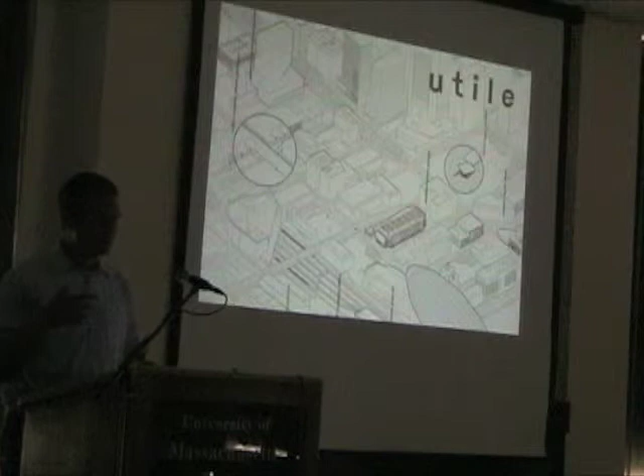I know I was just in the office of Dennis Swinford before this, and we were talking about a certain era of buildings which happened about 30, 40 years ago, where oil was cheap, insulation was not really a big consideration, and at the time new construction techniques and materials were coming on the market, specifically metal studs. That whole era of metal stud buildings with fiberglass—a small amount of fiberglass infill—is really a huge plague in the building industry right now. There are so many of these buildings that are being re-looked at and rethought, having to tear off and redo full building envelopes and things like that. I actually have one of those to show you as well.

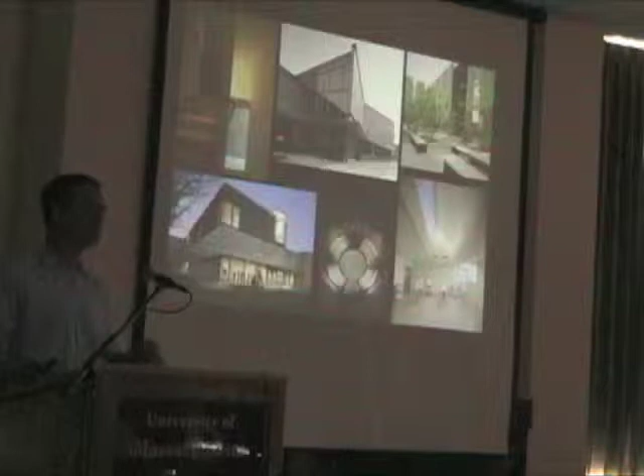But so I'll get right into this—just a quick overview of the firm. Utile, we have—I have 3 other partners, so there's 4 equal co-equity partners, and we all worked for Machado and Silvetti for a number of years. To a certain extent, we were working on some of the most important projects there and being integral to the execution, the design, the administration, all aspects of those projects. At a certain point, we kind of—we were working all over the country. So in the case of buildings like these, we've got...

Well, this is the building I did out in Arizona with Wendell Burnett, so that's not a Machado and Silvetti building. But this is the Provincetown Art Museum. This is the Rockefeller Stone Barns down in Pocantico Hills, New York. The Olson Library. This is the Arizona State University Hassayampa Dormitory Project, an academic village. Oh, again, one of the P-Town Art Museum. But also missing from this, the Getty Villa. So we were, me and my three partners, kind of traveling all over the country, very exciting, working on great projects.

And then we all started to have kids. And then we all started to realize, well, this travel isn't all it's cracked up to be. So in a sense, we also were then thinking about starting a practice.

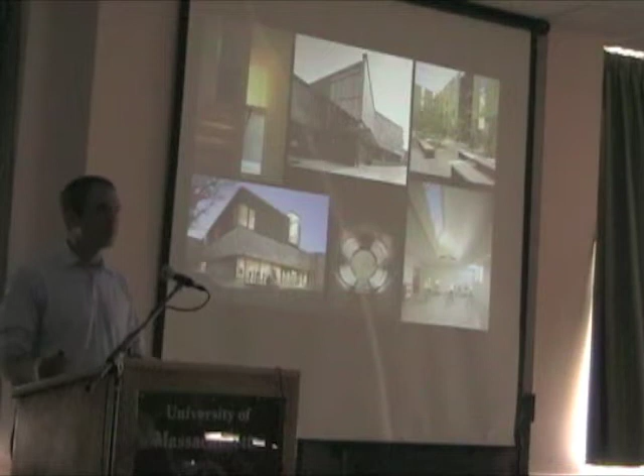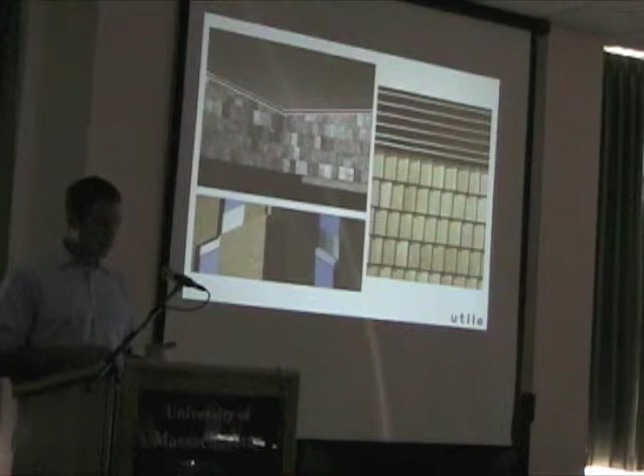And so when we finally did that, we decided very specifically that we were going to focus on the Boston area. This was just a slide I slipped in here as one of my own personal interests, that as I was working at other firms, the idea of developing facades which had a certain specific contextual relationship to the places they were at, trying to do so in a way that was a modern expression of an enduring vernacular.

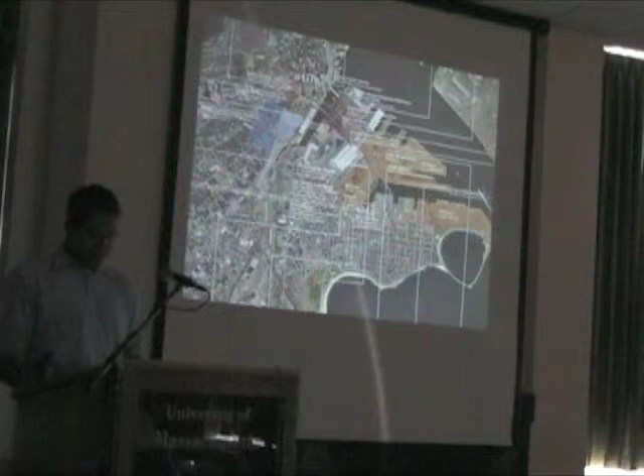Anyway, so we decided to focus on Boston and really get to know Boston better than anybody, be the Boston expert so to speak. There's a lot of competition for that post. In one sense I don't know that we ever achieved it, but we tried to position ourselves knowing that the Getty and all the wonderful museums around the country had already been built, the economy was starting to not look so good, and we asked where could we start to look for work, what markets could we look at. We really tried to become experts on a very local area, specifically Boston, and also tried to become perceived as experts on the approvals process in the city of Boston, which is onerous at best.

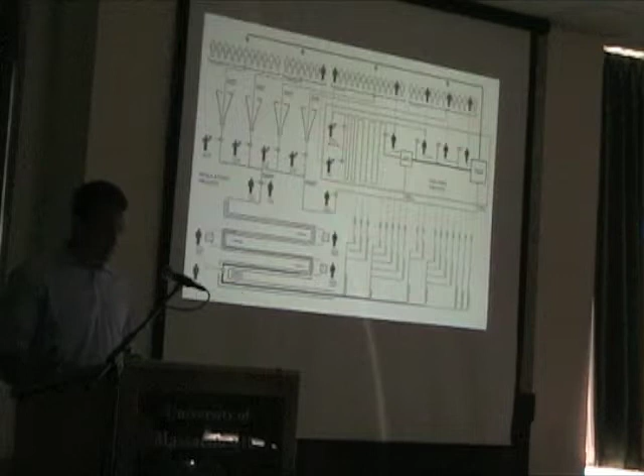And the whole nature of how a project works - how a developer buys land, tries to figure out what they're going to build on it, goes through the approvals process, gets turned through the meat grinder of the neighborhoods - by the time you get to an approved project, it's a different program, a different size, different everything than you thought at the beginning. How does one try to streamline that process, or get to know it well enough to be tactical about achieving an end in terms of good design, highest and best use, and serving your clients well.

The other thing I think about Utile, which I think is unique from the origins of where all the partners came from, was that we decided very consciously that we were going to really work with our clients in a very collaborative way. We all have our own agenda, but at the same time architecture is a bit of a service industry. So keeping that in mind, and always with the best possible design as a goal, focusing our energy in certain places helped us get to that goal.

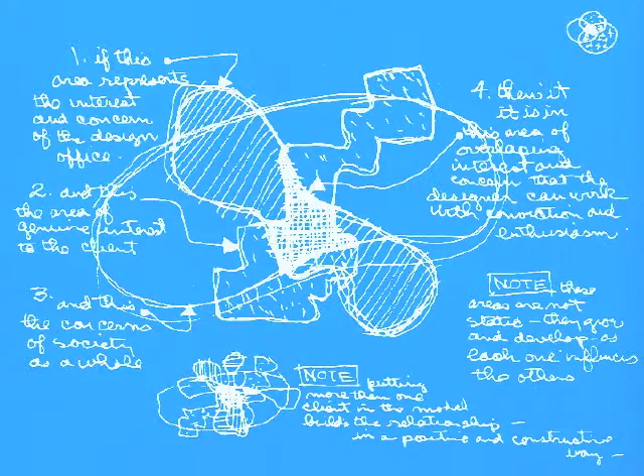And so we found this diagram that Charles Eames had made. What I like about it is it shows that if this is the area of interest of the architect, and this is the area of interest of your client, and this bubble represents the public concerns of society as a whole, then if we take the area where all three overlap and focus 95% of our energy there, we're going to come up with the best buildings or the best project possible. I think what differs in that mindset from a lot of firms, at least as they were even just a few years ago, is that we saw this as a liberating moment, not a restricting one.

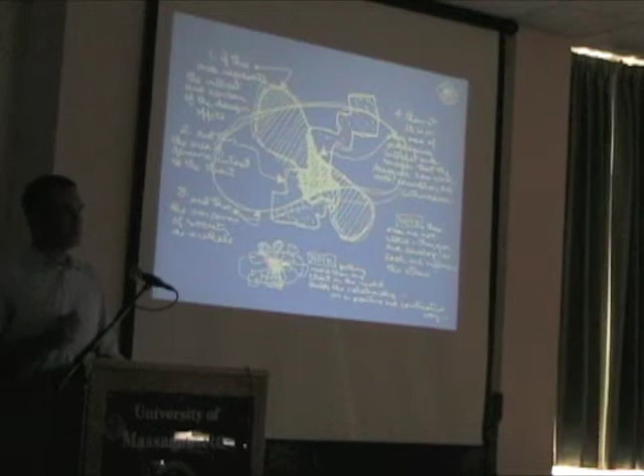This wasn't our big cave-in, where we're just going to acquiesce to the whims of the client. It was really about being able to find those territories where, when we focus our energy, we get the most result from it. So it was really that kind of thought process, and it's one that I think we've fairly successfully been able to live by.

So when we first started, the housing market in Boston was booming, and it was really through the vehicle of a robust housing market that we were able to start working on buildings of some size - buildings we could get built in these neighborhoods, going up with Utile signs on them during construction, getting our name out there and getting some good feedback from particular clients. In the case of these urban infill projects, they were always trying to solve a problem.

This is one of these old problem, new solution situations, and I actually think it's a new problem with an old solution. These post-industrial areas of South Boston were never planned to be residential neighborhoods.

They came along with blocks that had very wide dimensions. In the case of this building, which we call the trolley house because it used to house trolleys for one of the little sightseeing tours in Boston, the front of the building is here on West 2nd Street, and the back is on another street I can't recall right now - it was a through-block condition, a 115-foot deep block.

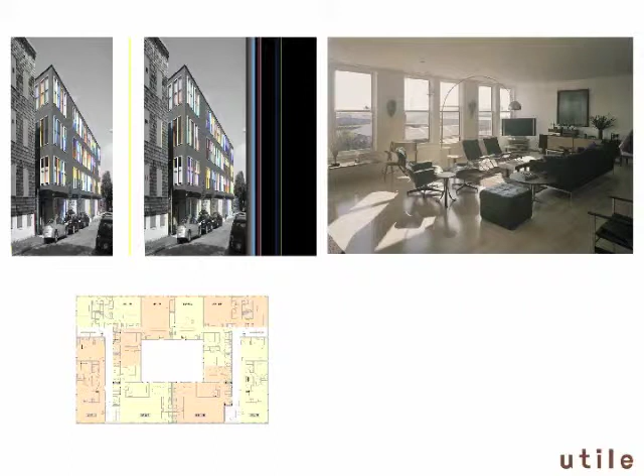So how do you end up trying to create good urbanism, keeping a tight facade on the street, holding the street line in a building that deep - too deep for a traditional double-loaded corridor, but not deep enough to separate into two buildings? We came up with a courtyard scheme, working collaboratively with the office of David Nielsen.

This one, and that one, and this one right here are similar sites. They're right next to one another - you can see the trolley house there, and this is the building right next to it, which we call 321. This building had the same condition.

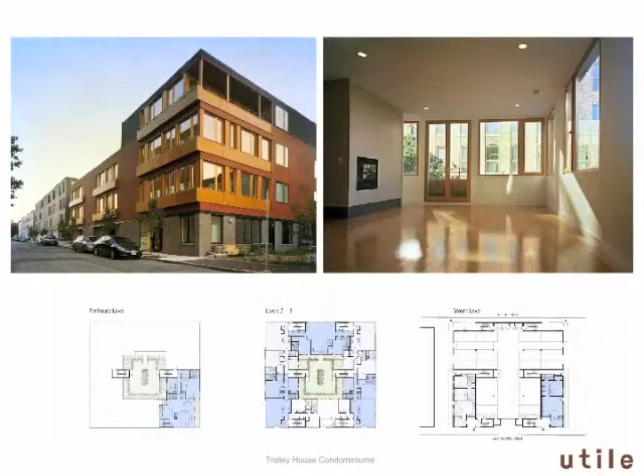What it was really trying to do was use a functional equation of point-loaded stairs instead of corridors - this idea of the double-loaded corridor. Has anyone seen the movie The Shining? The guy on the little big wheel running down that corridor - that's what we wanted to avoid.

We wanted to avoid that endless double-loaded corridor, which is oppressive and difficult. For a building like this, which otherwise would have had a double-loaded corridor if the developer had their way, we demonstrated that using point stairs eliminated all of that corridor space. The stairs have some construction cost, but they took up about 50% the square footage that the corridors did, and at $425 a square foot in this neighborhood, the developer very quickly realized how much of an advantage this was going to be.

Additionally, just to show it's not only about the numbers, we were also trying to create a condition where instead of a long double-loaded corridor with doors off a dark hallway, you're going up a stair - and at the four major entries, plus two more back-of-house egress stairs, you're able to collect 3 or 4 units into each stair and have it be more like a South End row house, if everyone knows the South End in Boston - more of an old 19th century row house community. So you've got 3, 4, 5 neighbors you see on a daily basis as opposed to 15, 20, 30. It really changed the scale perceptually of the building, in terms of how the communities work.

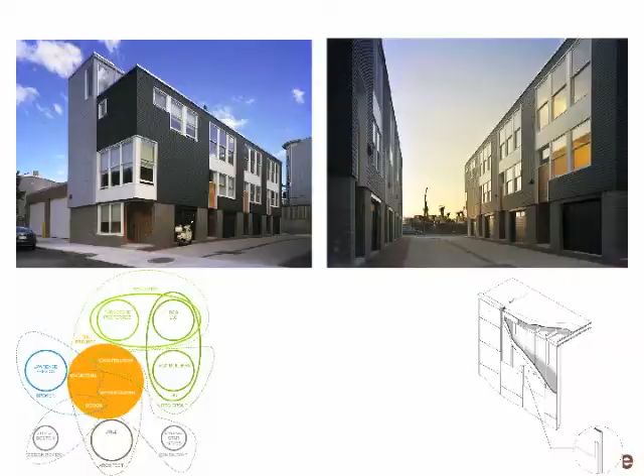I was having some consternation about our relationship with the developer, who also happened to be the contractor - they had their own separate contractor entity, and they'd brought in a real estate person, and there were all these entities flying around, all of whom seemed to think they had the authority of the owner. We all know it's really the architect that has all the authority. So we made this diagram one day in the office because we were getting feedback from all these different people, and thinking about how to organize it, prioritize it, and give it a hierarchy. We do stuff like this from time to time.

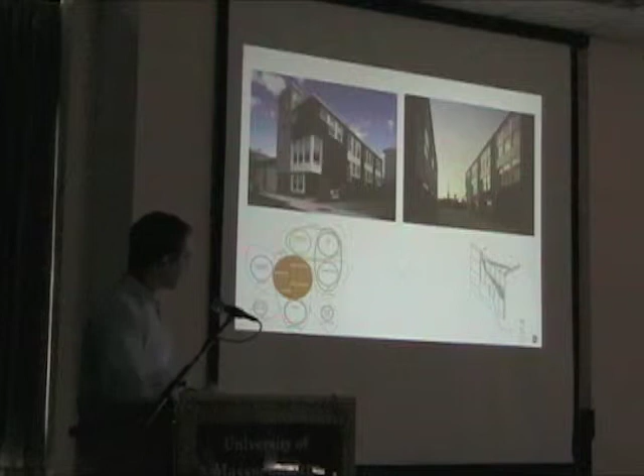So in addition to the urban infill housing work that we do, we also do a whole project type, I guess you'd call it, which we call the urban intervention or almost urban furniture types of projects.

In this case, this is the Harbor Island Alliance Pavilion, which is basically a visitor center for the Harbor Park, the Harbor Islands National Park in Boston Harbor, which prior to this project, and I don't know if it's still the case, I don't think so, but was the nation's least well-attended national park. Now, this wouldn't be a big surprise if it wasn't two miles away from a six million person metropolis.

And so really what the National Park Service wanted to do was begin to publicize this. They wanted some kind of a structure which helped, which was a place where people could go to find out information, to orient themselves. What are the harbor islands? What can you do on them? If I want to do this, which island do I go to? What are the schedules of ferry boats?

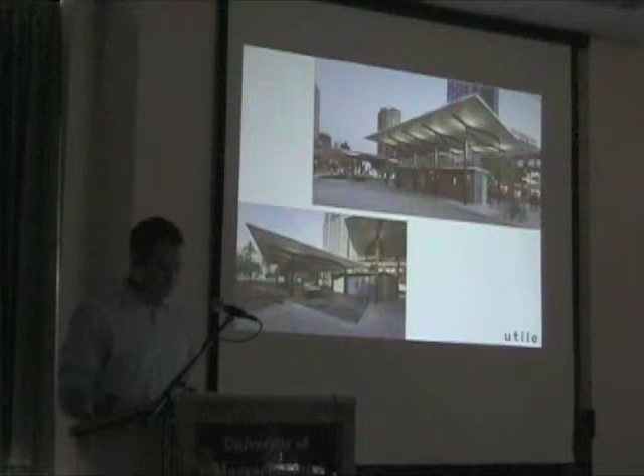But also to be a kind of 3D calling card or a presence on the Greenway in Boston, which as many of you know is one of Boston's most important public spaces. It's not even close yet to being one of its best public spaces, but hopefully at some point it'll get there.

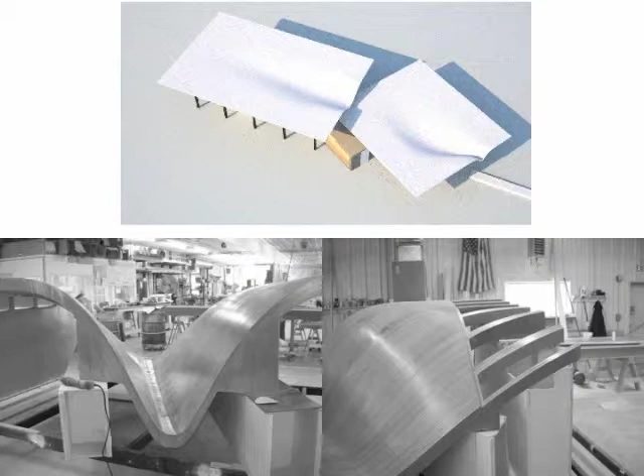So a very fun project, which what's interesting about the forms of the roofs here, which you can see these are the actual forms that were being cut with CNC routers and all that. We've had questions on these as to what the forms mean to us, and are they seagull wings? Is it a sail of a ship? And the real answer is no.

It's just a very fun way to get water off the top of the buildings. And so we were draining these things from one roof to the other down to a little water catch basin at the bottom, which then was helping to re-irrigate some of the gardens on the Greenway.

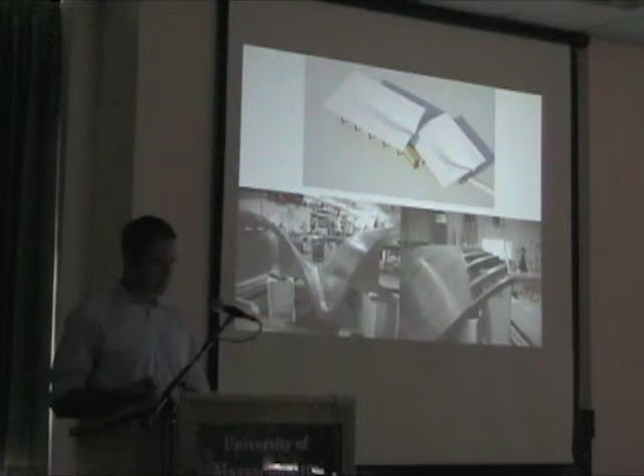So again, there's a kind of an empirical drive behind a lot of these things, which hopefully result in beautiful form. And it was really, I guess, a good example back to the Eames diagram of where our interest lied in the beautiful form of this, where the client's interest lied in collection of water and keeping people dry, in trying to overlap these complementary energies, let's say.

This is another one of these projects that falls in the same category. And for those of you who know the Convention Center in Boston, the Rafael Viñoly building, just outside of that. So what you're looking at here, this is the overhanging cantilever of the building over Summer Street here, and just outside of that, the Convention Center wanted to have a marquee sign.

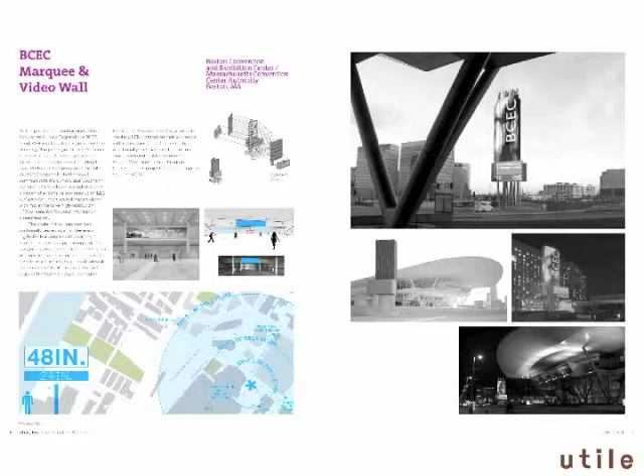So they hired us along with SGH, which is a structural engineering company, to come up with an idea for this. And we went through all kinds of studies on this, the Las Vegas casino signs and how these things work, don't work, what's good about them, what's obnoxious about them, and eventually came to a strategy that worked for the Convention Center.

And the basic idea is that this lower part here is all high resolution LED screen. So it's information, it's up and coming exhibits, things like that. And then the top is low resolution, and that's more for, let's say, more experiential or atmospheric types of program.

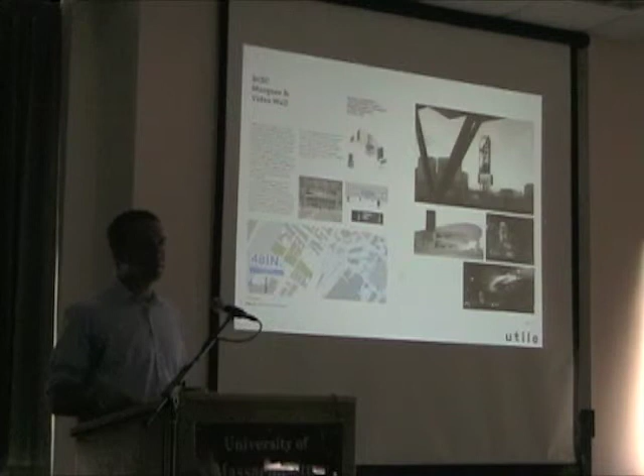So it's not necessarily announcing anything, but maybe if the flower show is happening there, there's a kind of moving composition of flowers under it or something, so that it became complementary to the information, but it also became a beacon, which you can see all the way up and down Summer Street, and is really a particularly important moment where all of these conventioneers coming from South Station or from downtown, and someone points that way, and to be able to see the prow of the Convention Center roof hanging out over Summer Street, and this marquee sign all lit up, seemed like a sort of good urban organizer.

And what you see here is this Andy Warhol-like composition here is just on Thursday of last week, we were testing the LEDs. They were turned on really for the first time, and we were cycling through the different colors and looking at this stuff, and so it was all very exciting stuff. So this is almost done.

This is a stair ramp project that we worked on with a loosely associated group of clients that came to us primarily as a single potential hotel operator down there, and then the convention center got somewhat involved, along with a bunch of different property owners.

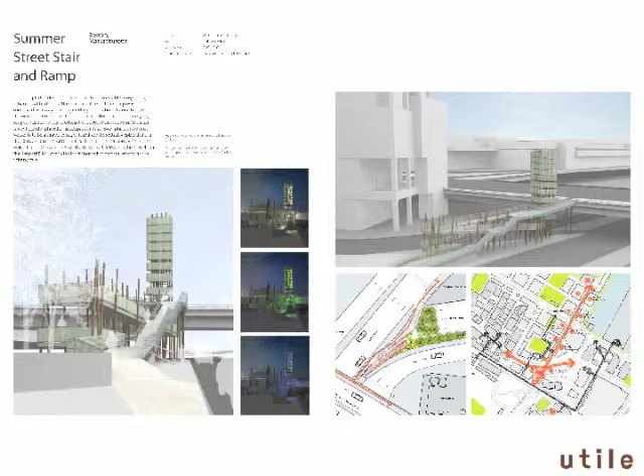This was a way to get people from Summer Street, which is elevated about 30 feet above the Seaport District, down to the Seaport in an accessible way. Looking at the existing layout of the land, there are very few ways to get from Summer Street down to the Seaport. There are two neighborhoods that really need to be connected, because either one on its own isn't a particularly robust neighborhood, but together they form a much more meaningful neighborhood. So this connection really was important.

We were originally proposing that this connection be made by something like a hotel, whose lobby could span the distance. A hotel lobby is an interesting project type, a public space which is privately owned and operated and maintained, but open 24 hours a day, and anybody can walk right through it - a kind of public-private collaborative space.

A few other types of project - this is a renovation project of a hotel in Provincetown. This was an old Holiday Inn, which then became the Cape Inn, and now it's the Harbor Hotel Provincetown. It's the largest hotel in Provincetown, 141 rooms when we got to it. It's 128 now - we suited some of the rooms and things like that.

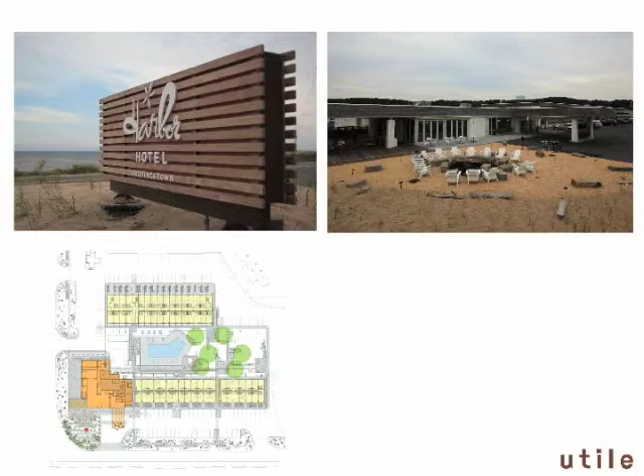What was interesting is this was a place where you'd go and take a shower in the morning just because you felt like you'd slept in the grossest place ever. I hope nobody who loved this place is watching, because I know a lot of people, for whatever reason, loved it as it was.

We had a super enlightened client on this, and we talked with this particular client group for a long time about whether they should buy it or not. We made trips down there to talk about it before they even bought it, spent some time there, and finally when they bought it, they hired us to renovate it for them, and it was a lot of fun.

So this is Commercial Street in Provincetown, and the water is right here - this dashed line is the high tide line. Originally the hotel was completely surrounded by a parking lot, and that's mostly still true, but at a couple of key spots it's no longer true. You've got two bars of rooms here, a pool area in the middle, and all of this was renovated.

The rooms are all renovated. We wanted to do much more extensive exterior renovations and repositioning, but the budget didn't quite allow for it. We did renovate the entire lobby, restaurant, and lounge area as well, and one of the things we did was create this very cool gas fire pit and an outdoor deck area, which is covered and enclosed.

This was an old porte cochere where people would come and drop their car off to be valeted, back in the heyday of this hotel. It had long since been in disuse, so we captured that outdoor space as covered deck space, took what was a parking lot out front and made it sand dunes with grass, and added this live fire pit, which people see going as they drive by in the evenings, and all sorts of people sit out here.

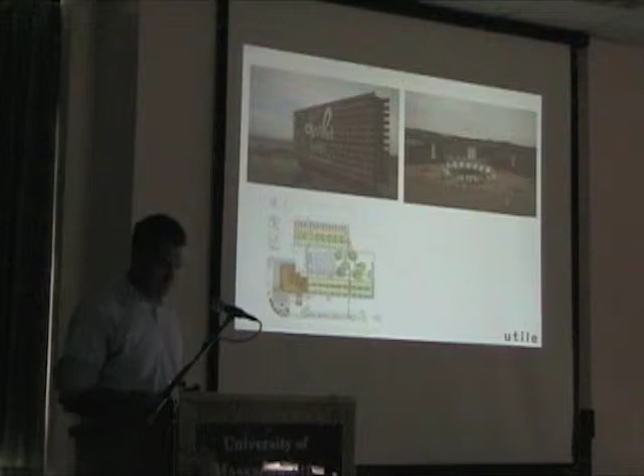It's something about fire. So the rooms went from being dark and nasty to being what the client aspired to - a super clean, modern look. They wanted it to feel no frills, not bogged down, as bright as possible, so we renovated all the rooms and also the public spaces.

So this is that old carport area with the captured sun deck, looking out to the ocean. Part of that dunescape in front of the restaurant was so the dunes come up just a little bit, so you don't have cars parked in front of you, but it also begins to screen the road, which is right there. So yes, you'll see cars go by, but you don't feel like you're part of the road - the road surface actually disappears from view.

Some of the interior spaces—curtains are great for hiding things that are otherwise immovable, like big fire standpipes, fire protection sprinkler standpipes, and things like that. I guess who doesn't love a bar?

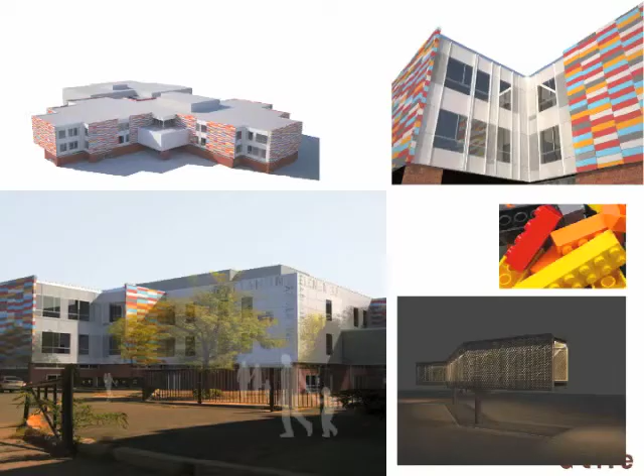So a couple other types of projects we're looking at: we were doing some elementary school work. This is a building called the Mattahunt Elementary School. It's in Mattapan, in this really super cool location in the city. It's an urban, inner city school, but at the same time it's on this piece of land that's surrounded by trees—a real unique condition there.

When we came to it, it looked like any hospital along I-80, anywhere USA—a totally white building with very small punched openings. The one thing that was happening was that the building envelope was failing. The systems weren't working, there were breezes coming in, the kids were cold and drafty. But the ultimate embarrassment to the city was that one of the sprinkler pipes burst, and somebody driving by could actually see water pouring out of the third floor between the cracks in the building envelope. Normally you'd expect a pipe burst to result in a flooded basement—well, this was being seen on the outside of the building.

So they decided they needed to redo that. Lucky for us, we got a nice project out of it. We took the tack that it's an elementary school—kids respond to Legos.

There was also an ethnic demographic there which was really excited about the color of the building. We tested several safer colors that the city had preferred—I think not because they liked them better, but because they thought that's what people would like in general. When we went to the school to show this to them, they almost unanimously loved this more robust color scheme.

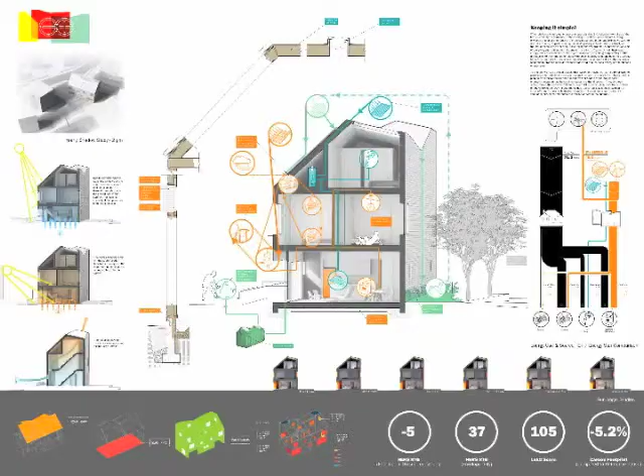But we do—and I guess we're going to find out tomorrow night whether we won this or not—these boards are from a competition we recently entered. This is a competition with real sites and a real building at the end of it.

We had a developer partner with this. It's a competition put out by the BRA and the mayor—Mayor Menino in Boston. The idea here was that you were supposed to come up with multifamily housing projects which were prototypable, redeployable, and produced more energy than they consumed.

For various reasons, the sites they had for these weren't deep in the city—they were more on the fringes, more of the stick-built, wood-framed outskirts of the city. I'd say outlying, but I suppose that's not very flattering to some of those neighborhoods, which I was actually born in.

The idea is coming up with a prototypable housing idea that we've got to be able to build, make it work, and sell it—but also that other people could then use it as a blueprint for how to do this. Once you get into some of the ring neighborhoods of the city, there are lots of these little empty sites that probably in the past had a triple decker on them, which I believe is Boston's most important contribution to architecture, by the way.

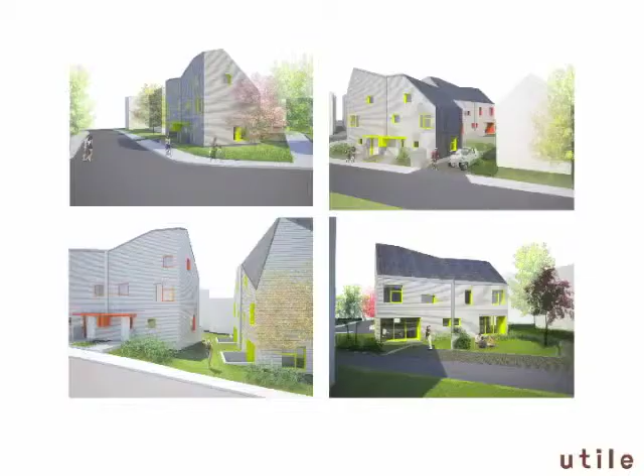The idea is that you could create something that Joe Pickup the builder could pull up with his pickup truck, his typical subs, his four guys, his carpenters that work with him, and build one of these things with only a little extra help in terms of things like photovoltaics, and actually reproduce something like this. So anyway, this was our stab at it, and we'll soon know how we did.

We also occasionally dabble in single-family houses. This is a very interesting client in the Adirondacks, and this is a vacation house. What's interesting is this particular house, contrasted with a couple of the next ones I'm going to show you, really are at the heart of some of what we're going to talk about here in a few minutes. I'm going a little longer than I thought for this portion, but I apologize.

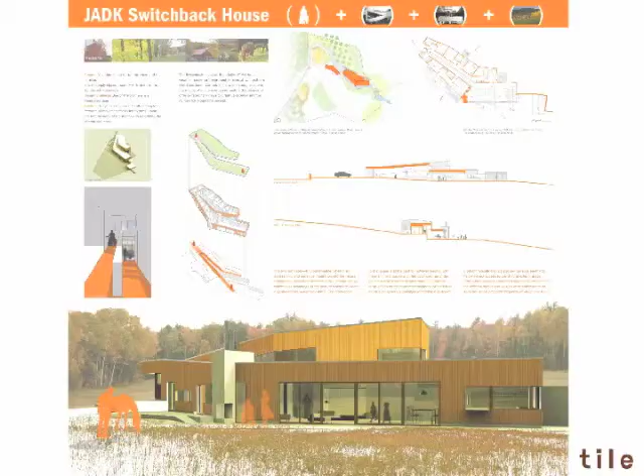There's the idea in design of radical customization, which is that every building is very specific to a certain client in a certain place, and it can't be reproduced ever, anywhere, for any reason, and it's sacred. That's fun to do, we like that. If a client comes to us and gives us that as a program, sure. But those clients are increasingly harder and harder to find.

At the same time, with the cost of building on the rise, even through this whole last few years of recession, building and construction prices did not dip by that much, not even nearly as much as the real estate market did. And so we also like to look at things which are more prototypical.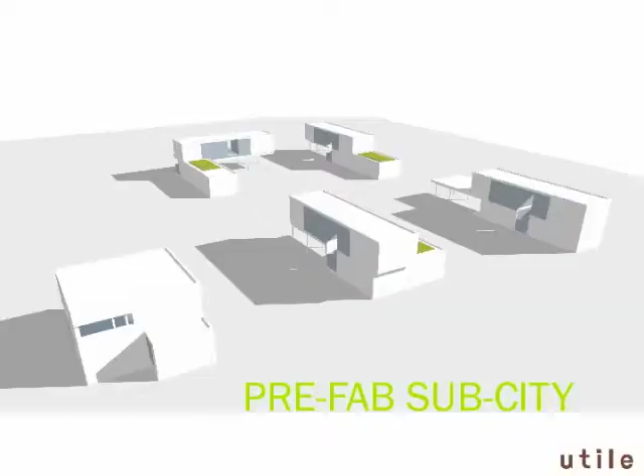In the case of this, we're now talking with a couple of different prefab companies about the idea of launching a series of cool, green, smallish suburban houses. So taking our show on the road, out of the city, and really starting to look at some of the suburban transit-oriented types of sites that might be out there.

This is specifically not an attempt to solve affordable housing in the policy sense. We do a lot of affordable housing in our office, and we probably put more affordable units on the market than we have market rate units.

But in this case, the goal is that we wanted to develop a house that, say, an architect could afford to live in, right? Which is increasingly harder and harder to do if you live in the Boston area. I know prices are a little more affordable out here, right, Stephen? But if you're within a fairly broad ring of the city of Boston, and you also don't want to commute for two hours every day, finding affordable, efficient, not too big, well-designed houses is not really an option.

So that's really kind of a subset of the other types of housing we do. And it's one of these things where, again, it's a conversation that Stephen and I have had before when I've come up on reviews, is that we always like to solve big problems with small solutions. It's really the idea of planting the seeds of good ideas which are reproducible and redeployable.

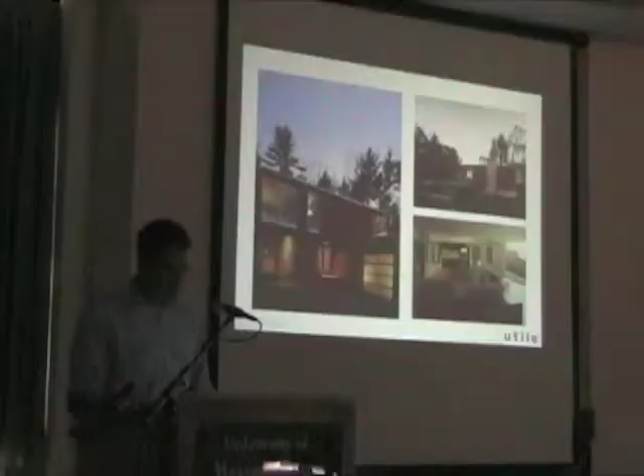We even had the opportunity to build one of these, and we did it in the form of my house. I was the guinea pig on this. In the case of this, I was the architect, obviously, but I was also the general contractor, and one of the carpenters, and one of the concrete guys. So it was one of those cases of trying to build a house nights and weekends while trying to run a firm in the city.

At the end of the day, we built this for about $110 a square foot, which in terms of construction in the Boston area is about 50% the cost of what you'd normally expect to see for a custom designed house. I guess the idea being that at some point these wouldn't be custom; they would be part of a choice that someone would make.

I want this one or that one or this one. So this particular house is all geothermal. We've got lots of glass, floor-to-ceiling glass, very simple forms. Put a little extra money into the garage door so that it's a cool thing when you pull up, as opposed to something you don't want to see. And without being too ambitious about it, for not a lot of money.

Putting together a house which is very livable. So I'll quickly go through some of this. We also do a lot of planning work. I think I said that earlier, but this is a project in Dorchester.

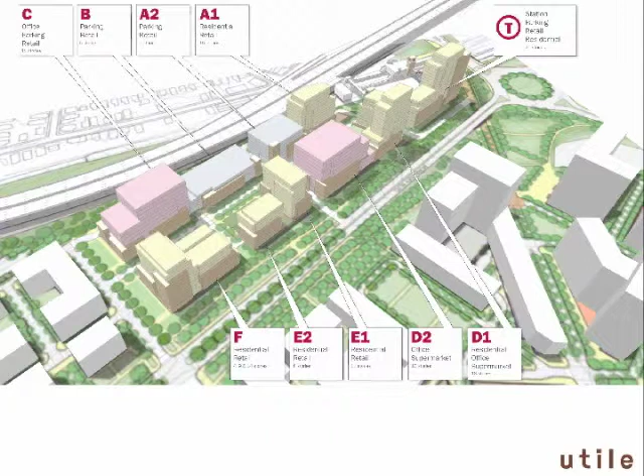Just quickly, this is the UMass Red Line station on the T station on the Red Line. This is the Southeast Expressway in this direction to Boston, this direction to the South Shore. This particular client of ours had purchased 9 acres of land here. This is currently the site of, let's see, I think the Boston Globe building is right here. I think the WB 56 building's here, and then there's a Shaw's and a couple other kind of big box, not too dense things here.

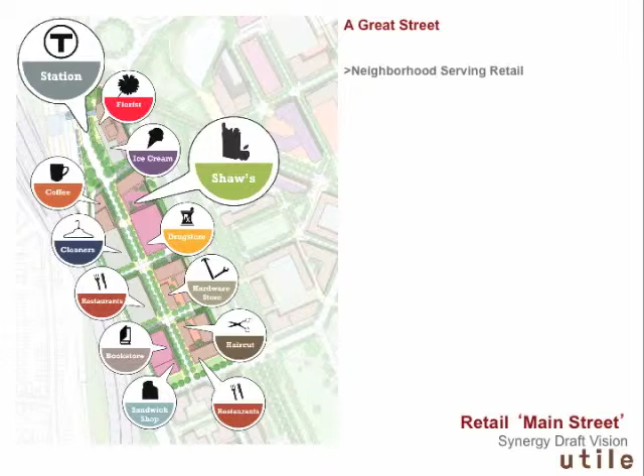So we planned this neighborhood for them, came up with block sizes, program types, target tenants, things like that. And then also took this through an approvals process and got a certain zoning envelope approved for this client.

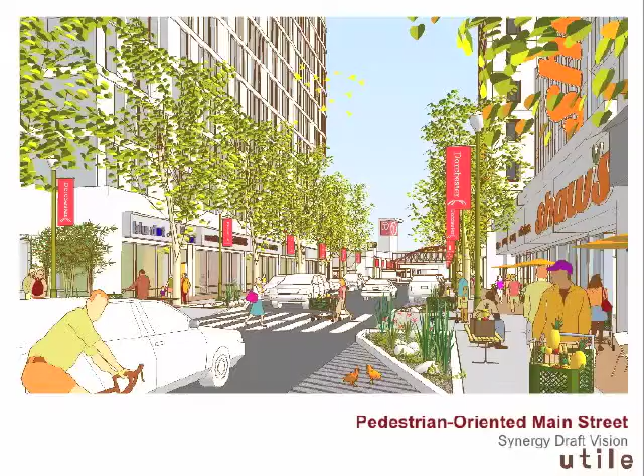And really there's a kind of artistry to these types of images where, as architects, we look at these and think, well, this isn't maybe such a beautiful rendering, but at a certain point, it's about creating a representation or an imagery which is readily interpretable, and playing off what we hope are the most optimistic tendencies of people, that people will see in things what they would like to see. You try to make images that are as friendly as possible, but that also leave as much open to interpretation so that people can place their own desires on a project. And this is a very useful tool when trying to get things approved.

Similar image from that same project.

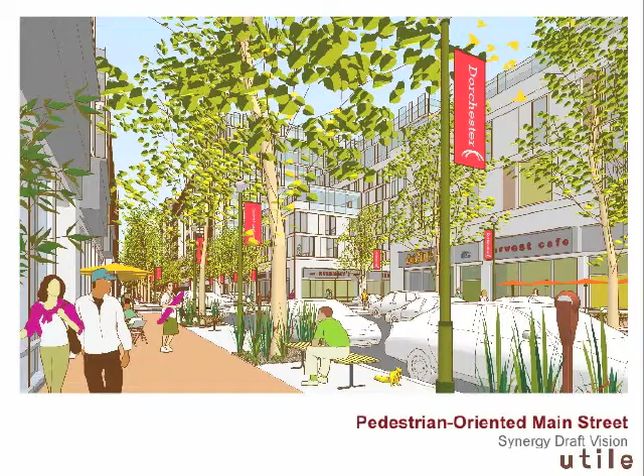And then lastly, and then I'll get into the other stuff, which is we've been doing some work overseas in Abu Dhabi. Abu Dhabi and Dubai are, I guess, sister cities, you'd say. I suppose if you lived in either one of those, you'd be offended by that remark. But they're two cities which are separated by about 2 hours by car, both in the UAE, the United Arab Emirates. Both cities have huge global ambitions.

And the difference between the two is one is a purely financial center, the other has all the petroleum wealth. So Abu Dhabi is the one that seems to have all the petroleum wealth, and Dubai, when the markets crashed, was probably hit worse than any city in the world. And so many things stopped at that point, but in Abu Dhabi things just kept going, and now they're looking, to their credit, with the Abu Dhabi 2030 plan, looking beyond oil.

They realized, in one of the sheikhs we had met with out there, somebody in the royal family had said that my grandfather rode a camel, my dad rode a Rolls Royce, I drive a Rolls Royce. My son will drive a Rolls Royce, and my grandson will ride a camel. So this may or may not be true, but the perspective is there that the free ride will only go on so long, and while they have this resource, which is otherwise hurting so much of the other parts of the world, they're actually much more interested and serious about the greening of their residences, the greening of their cars, and all of that than we seem to be at the moment. And at the same time, looking to build up an infrastructure, both financial, entertainment, leisure, that once the oil does run dry, they have an actual source of longevity and income.

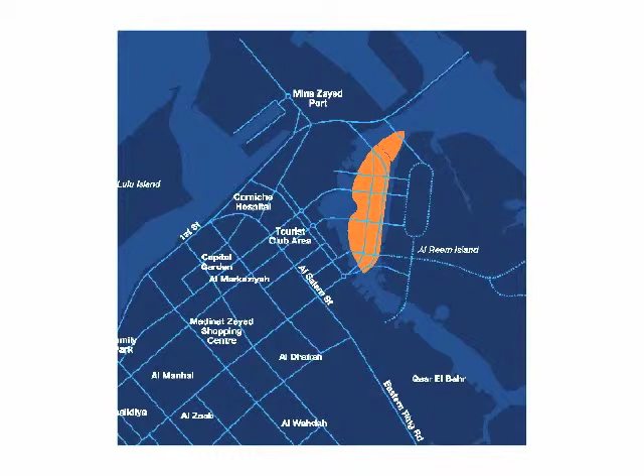So basically, in this particular case, this is an island that wasn't there two years ago, all kind of put together by the dredging out of certain areas around the city for freight routes and things like that. But they decided to take this island—just to give you scale, this is probably Lower Manhattan would be about, you know, this big here.

So it's probably half the size of Lower Manhattan, and it really is looking to be the financial center of Western Asia. What's interesting about Abu Dhabi is it's within a 5-hour flight of three-quarters of the world's population, which makes it incredibly convenient, even though the day I was there last, in July of last year, it was 123 degrees and 90% humidity.

Having spent 5 years in Arizona, I thought I was totally equipped for the heat, and I realized I wasn't.

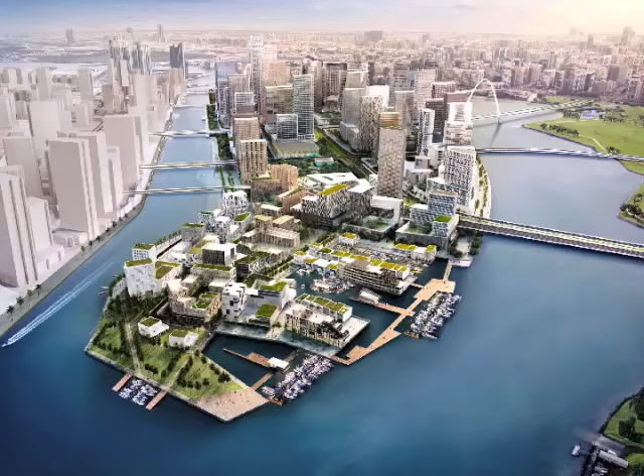They're looking beyond, trying to come up with an image for their city—one which is specifically not international style, but has a global appeal, one which is exclusively Arabic, contextual, environmental, not necessarily about a Muslim architecture, but really more about an Arabic and Gulf vernacular.

That's why they had us doing these different studies for different buildings. None of this exists yet—these are all ideas for how a city could appear, to give it a kind of organic feel that isn't just 90 or 100 of the same exact high-rise building, but buildings which all have their own flavor and their own specific environmental response.

So, future use—sorry, it's taking me so long to get to this—but the idea here is that at Northeastern, where I teach, a couple of years ago...

When I say we, I mean two other people I've talked a lot about this with, and a few other colleagues we teach with: Kiel Moe, who's been teaching at Northeastern the last few years and is now at the GSD, and Peter Wiederspahn, who's been at Northeastern for many years.

We teach what's called the comprehensive studio, the final studio students take there. We always wanted to gear this toward really taking a project beyond conceptual design—getting into the details, talking about systems integration, things like that.

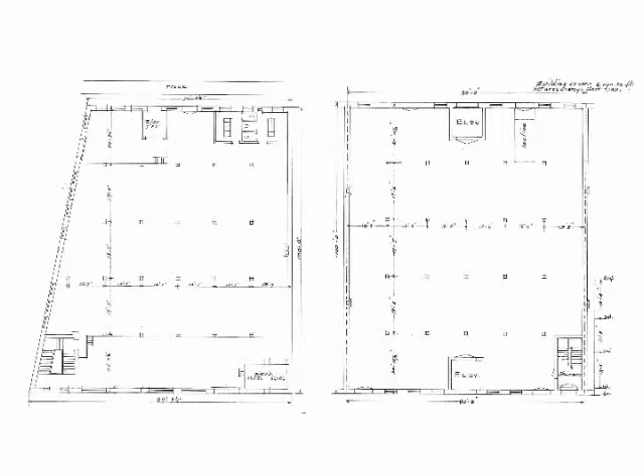Office space, though, can work with that layout. Office seems to be the one program with the least real requirements and demands on space, beyond certain size floor plates, which then become, at least in the eyes of the real estate industry, leasable.

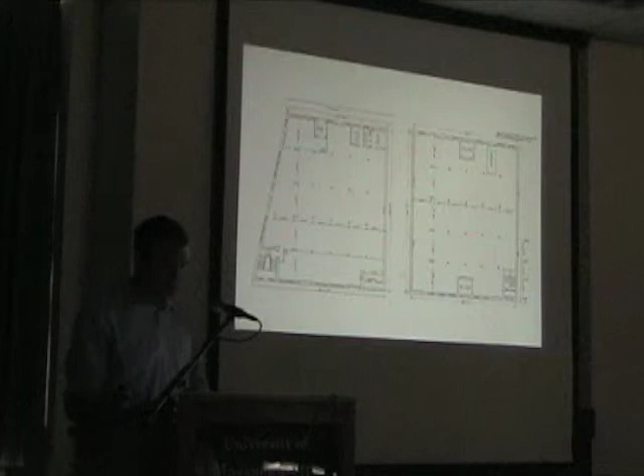But looking at the attributes of these buildings which made sense, which were, in this case, the 13'6" floor-to-floor heights. So one thing that became clear right off the bat is that floor-to-floor heights, building dimension sizes, and structural grids became one of the real focuses here.

Looking at this idea from three different ways: structure, enclosure, and energy.

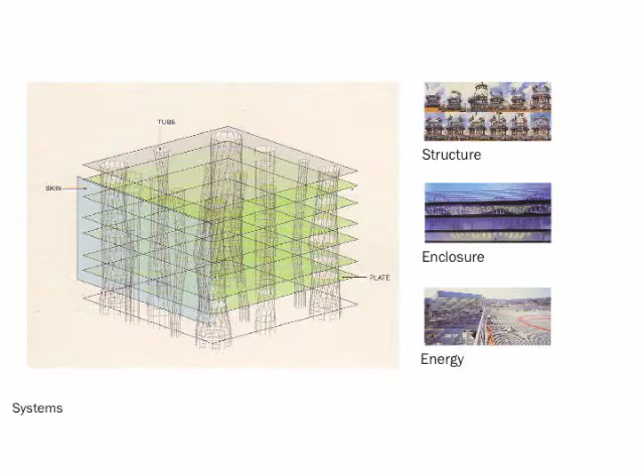In the case of structure, the first and most primary piece is that for a building to be renovatable or reusable, it has to have a robust structure. Almost every different program you might tuck into a building by code has a different live load calculation, so you want to capture as many of those as possible. That's from the basic loading standpoint, but then also the idea of structure that allows for flexible space.

The 11-foot grid spacing on these things doesn't work very well, but it's when you start to get longer spans that you begin to achieve this flexibility in a greater way.

Enclosure, in the case of the Fort Point buildings, is exclusively all brick. We were thinking about what is it about the brick that makes this a great enclosure system, one that's been so enduring. Other than being a durable material, you can work on brick quite easily in terms of repointing it, or if there's a leak, it's pretty easily identifiable.

Surface fixes to that system can be made, and small areas can be pulled out and redone. And when a failure happens, it doesn't tend to be a full system failure, it tends to be a very localized failure. So that was important too.

And then energy systems, which in terms of the old Fort Point buildings, they kind of ignored. So that really became the area where we could start to say not only learn from the older buildings, but begin to improve upon it. If we built our 21st century Fort Point warehouse building, or next-use building, that seemed to be among the areas we could develop much more readily than the older buildings could.

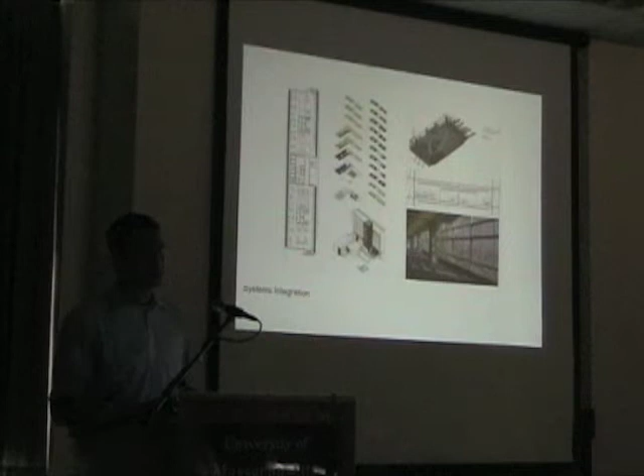From that, systems integration became one of the key elements. So it's not just adding air conditioning, but how do you do it, and there's all kinds of ways we'll talk about. And then there's really just, I put this slide up.

This is the Renzo Piano project, the Paganini Performance Center in Parma. I think it's beautiful because it used to be a multi-story building. It's now a single-story building with a triple height space. Walls and parts of the building that used to be interior are now exterior. There's a certain flexibility. I can promise you when it was built, it was not a performance arts center. So there's a kind of flexibility to this building type, which seems to make a lot of sense.

And again, it's a robust structure. In the case of this, you can start to see a much better clear span. And then an envelope which has thermal mass to it, which has longevity to it, and which can be an interior-exterior type of condition.

So I'll quickly talk about a couple of renovation projects and adaptive reuse projects that we've done, and what we kind of learned from that.

This particular one I did while I was still at Machado and Silvetti, but this is the Rockefeller Stone Barns in Pocantico Hills, New York. The idea here is that the Rockefellers were going to donate this project back to the township of Pocantico Hills, and the people of Pocantico Hills said, 'Please don't. We'll lose the taxes on it, and we'll have to maintain it, and we'll go bankrupt.' So, as only a Rockefeller could do, they decided to turn this otherwise series of Norman stone barns into a center for food and agriculture, nonprofit, self-sustaining, et cetera.

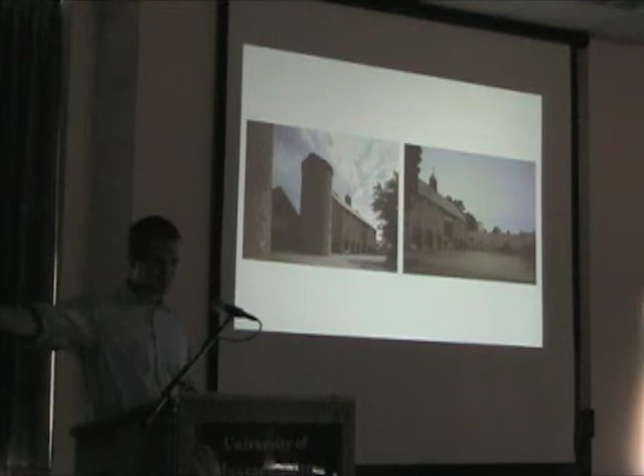So, program great. The story of the place is much better than the architecture that we did there, and it's really quite an amazing idea that allows local growers to compete with Southwest growers throughout the winter. There's a restaurant here which gets 75% of its produce and livestock from the site, as well as classrooms, administrative spaces, event spaces, and it's also a kind of amateur petting zoo, where you can take your kids and walk around and pet the pigs and the sheep and the chickens, and the next time you come they'll all be different ones, but it's still fun.

You don't tell the kids that part though.

So what we found is not too dissimilar from the Parma project: in this building there were incredibly good spans in an otherwise masonry building. There were almost 50-foot spans in what was the old hay barn, where trucks used to come in and hay would come up. There were beautiful big stair towers inside, so as the hay built up you could walk out on top and throw it down onto trucks. Then there's the old dairy barn, which has about a 54-foot clear span and still does to this day. I can't figure out why someone would spend the time, effort and money to get a 54-foot clear span in a barn that housed cows at the time—cows have stalls, there are all kinds of opportunities to break up that space, to post it up, but no, they didn't. It's a column-free space, quite amazing.

This is the restaurant Blue Hill at the Stone Barns—there's also a sister restaurant in the city. The interior was done by Asfour Guzy Architects, Peter Guzy, a very good friend of mine. We were the prime architects for the rest of the facility—the landscape, the grounds, the buildings themselves, the infrastructure, and all the other event spaces and classrooms. Asfour Guzy, who had worked with that restaurateur before, did the interiors of the restaurant, and they did a super nice job with it.

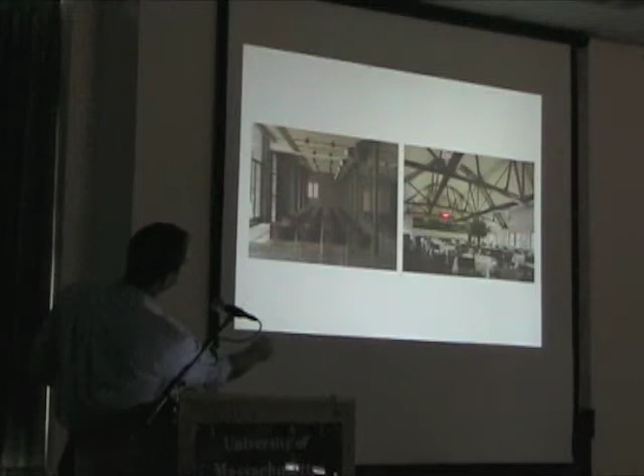Again, this idea of super robust structure, clear spans, is really important. With systems integration, in some places you just have to decide we're not going to be able to integrate it, because if we do, we'd have to drop the ceiling so low it doesn't work. In this case, Peter's excellent idea was to come up with an acoustic plaster ceiling that vaulted—this is a gabled ceiling. He came up with this parabola-like form, which allowed a whole lot of infrastructure to run in and above it. So it's kind of a plenum, but at the same time it exposes the trusses and creates a very beautiful space. The old ceiling here was plaster, running along the bottom of this bowstring arch in a vaulted way—it was actually quite beautiful at that point too.

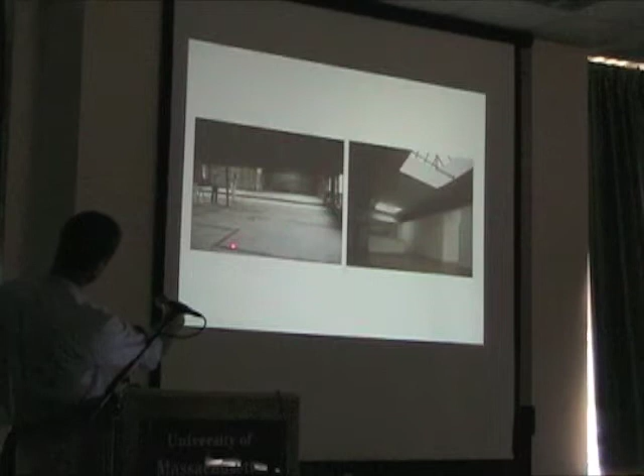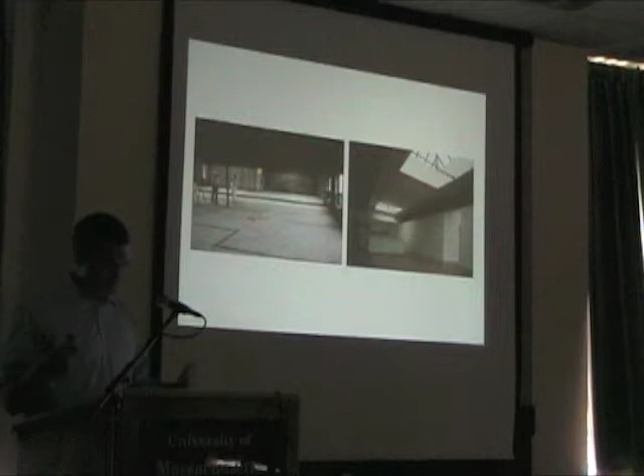Subsequently, we got into this building and were incredibly nervous about renovating it. Then all of a sudden we opened it up and realized we'd got a completely column-free space on the third floor, and second floor too if we wanted it, and that the second floor structure was incredibly deep, wood timber framed, which at one point held up a full auditorium—probably twice the size of this room. Interestingly, these huge W's and beams, or I-beams in that case, were there, and we were able to leave them exposed.

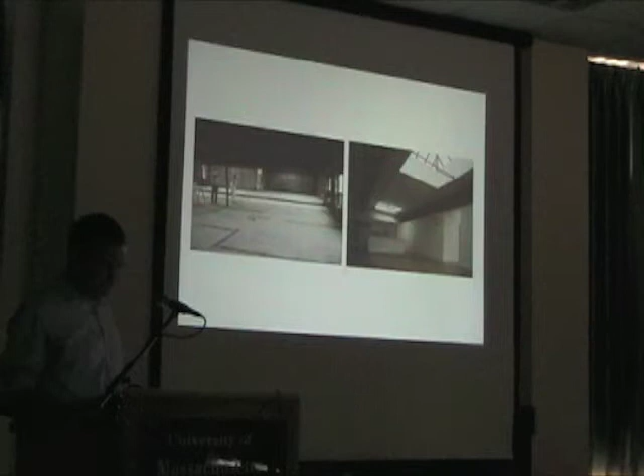And then one more renovation project here: this is the 38 Oxford project at Harvard. We were the architects of this building, along with ID Group, a data center specialist. This was the old particle collider at the university, which had a very short active life. What you're looking at here is the Northwest Labs, just recently completed by SOM.

This here is the above-grade manifestation of an old tunnel, which was a quarter-mile circumference tunnel underground, in which particles were shot around and collided, like a miniature version of the Large Hadron Collider in Switzerland.

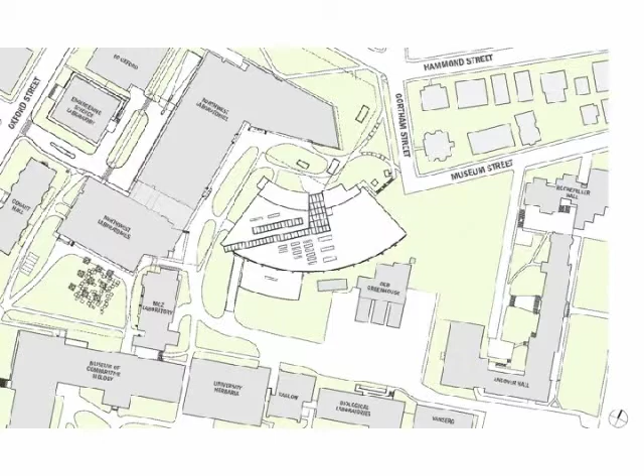We were asked to renovate this building to become, A, a data center, and B, the labs, workshops, and high bay spaces for the LPPC program, the Laboratory for Particle Physics and Cosmology at Harvard, which was also constructing devices and instruments that were then heading over to Switzerland to the Large Hadron Collider.

This is where the tunnel now has two stories above grade. This was just one giant empty space, about 35 feet high, half of which was above grade. So the floor, when you stood there, you were looking up 35 feet to the structure.

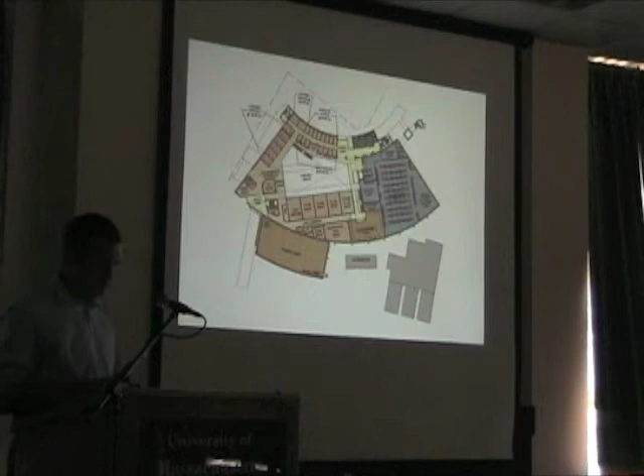But you were about 18 feet below grade at that point. So anyway, we came up with a scheme that we hoped took advantage of that. One of the interesting things was, again, another building which had a clear span from one side to the other.

It had this interesting moment of walking in at grade where you were actually above the main floor, the main space below. So this being the view as you'd come in at the entrance, you'd then come to a balcony which would overlook down into the high bay space.

And then we organized the different lab spaces like the game show Hollywood Squares, which is a spin-off of the super cool Hitchcock movie Rear Window, where Jimmy Stewart sits with his broken leg in his chair, observing all the matrix of apartments across the back alley from him.

The idea was that as people would enter the space, they'd look across this high bay space to all of these open labs, using the same exact garage door I used at my house, except in a kind of hangar door configuration. These glass doors could be set up so people could view into those labs across from the high bay space, look down and see all the different instruments and things getting built and constructed.

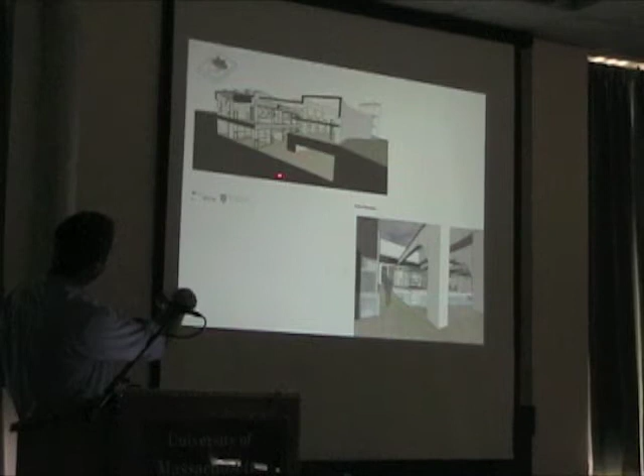These doors, being operable, would also allow for good verbal communication between the various researchers and the people working down in the shops in the high bay space. Also, if components needed to be brought by forklift or gantry around this high bay space and then up and loaded into each of these labs, there was an easy way to do that.

This is a view of what it would have looked like, and this was among the projects that 2008 took as a casualty when the market fell.

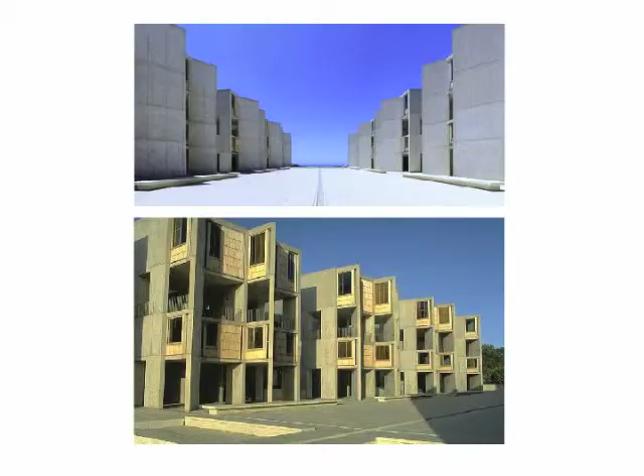A couple of buildings I thought were worth pointing out: the Salk Institute, my favorite all-time building, and it's one which is not unlike the campus center here, I mean the Fine Arts Center, in terms of its vintage and its language. But it's a building which, when it was being built, Lou Kahn had no idea he was actually designing the world's best school of architecture as opposed to a research facility.

And I say that jokingly—nobody laughed. But when you look at it, this building has so many other uses it could possibly have. So, just a brief look at the section of this.

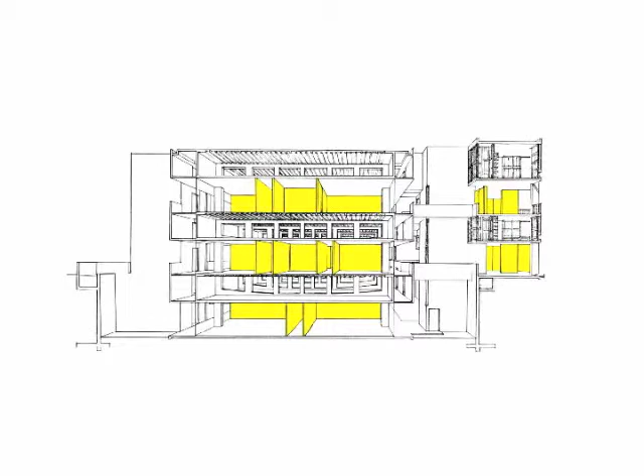The idea is that Kahn isolated structure and created these long spans. These long spans then gave the great alibi for an amazing plenum space for ultimate flexibility, which allowed all of these walls underneath those plenum spaces to be moved at any time you want. They're very disposable, movable, reconfigurable.

So I always thought of this like architecture studios, mostly because when I was there I wanted one of these to be my faculty office, which is why I came up with this plan. There are spaces which are purely functional, reproducible, flexible. There are spaces which are contemplative, and then there are places which are about solitary or privacy.

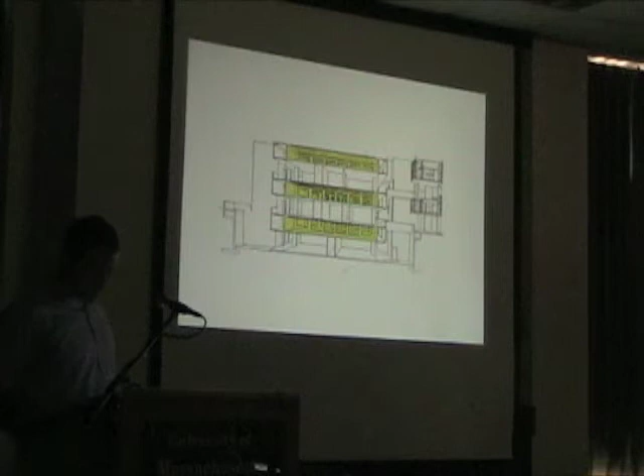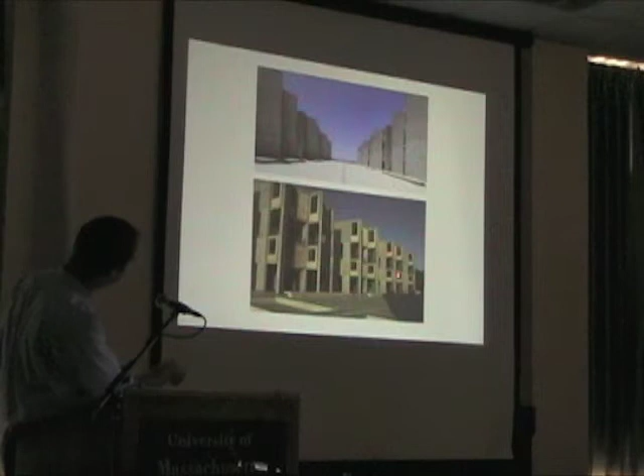So the contemplative spaces are these types, and the solitary ones are the moments up here in these offices, which by the way are absolutely beautiful. Arnold Friedman once told me that if you really want to know how thoughtful an architect was, go look at the bathrooms—what do they look like? And I can promise you the bathrooms in each of these private offices are like the Taj Mahal of bathrooms. They're just absolutely spectacular.

The floors have different floor-to-floor heights, many of which are designed to be bifurcated, so that one high space could be made into two lower spaces depending on the program. For instance, going from lab space to dormitory space, something like that could happen. In this case, it's library and media center.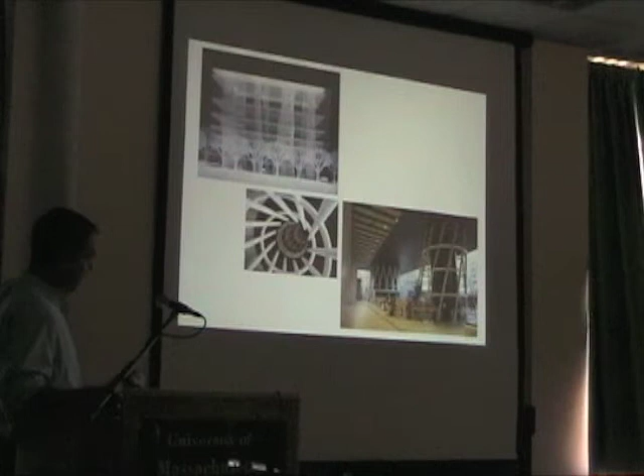One of the things that the Fort Point channel buildings don't do particularly well, I think, is respond to their environmental context. Really, they have a minor urban response, which is front doors on one side and a slightly larger cornice on the side that faces the street. Again, beautiful windows and all of that, but they have kind of the same diagram on all four sides, no matter whether you're facing south, north, east, or west.

In the case of this building, what drew me to it was that it really does look at all different sides, all different orientations, quite differently. The south side is a double skin wall, which allows you to absorb all this radiant heat in the wintertime and reflect it in the summertime. It also, because of the double skin, allows these northern winds, which happen in the wintertime, and sunlight, to be kind of put at bay.

The western side is, for the most part, opaque, but where it's not, it has these vertical louvers, which make all kinds of sense for solar screening, daylighting, and glare control in the spaces.

And then the other interesting thing is in terms of systems distribution, where systems can make their way up through the structure. Most of the time these structural elements are empty, but oftentimes they do have structure and then this kind of multi-point system. There's also a two-way metal framing system which gloms onto these things, and then a raised floor above that, which allows for systems distribution. So at multiple points in the building, all kinds of systems can come up through these larger tube elements and then be distributed through the floors.

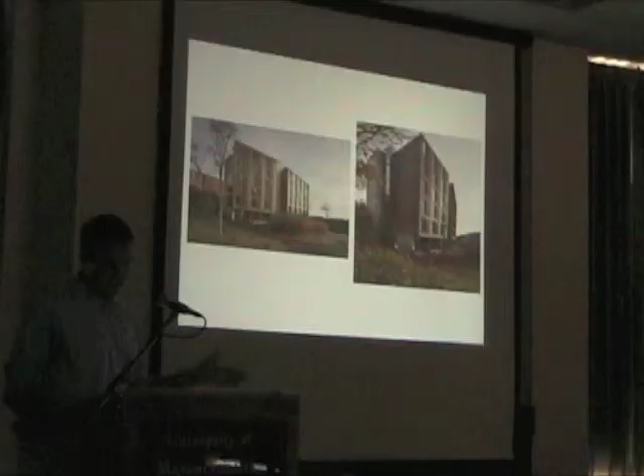But the reality is, upon more deep investigation, you can start to see, and this is a typical plan of a room, that the systems are entirely integrated and embedded in the structure. In the case of the vertical systems, they're embedded in framed walls, and they can be changed and modified if needed.

In terms of heating and cooling systems, this building deploys thermal mass radiant systems to radically reduce energy costs while also enjoying the benefits of super low floor-to-floor heights. They had a very serious zoning envelope or height restriction to stay within, and also had to run a proforma with a very constricted site. They had run a proforma that said if we can't get X number of rooms, we won't be able to make this work financially, we won't be able to get the revenues back to cover the cost of the financing.

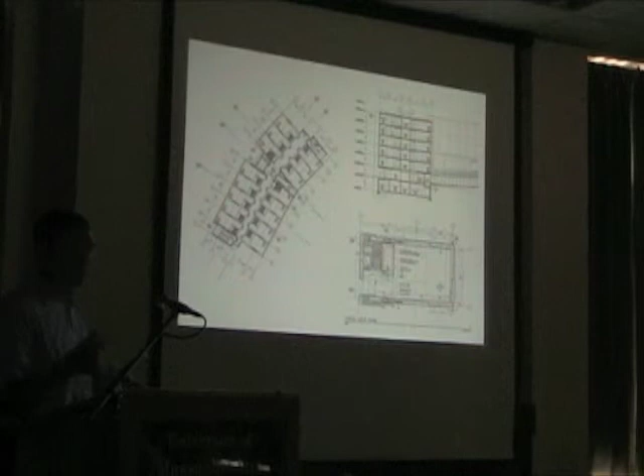Their initial ideas were to get 5 stories in this, and through beginning to integrate the systems and compressing the floor to floors, they were able to get a whole other story, and therefore a whole other bunch of rooms to help pay for all of this and help with the financing. So it's really an incredibly beautiful building, one which takes the idea of thermal comfort, low energy use, and systems integration to a whole other level.

One of the other important pieces to this, and this project has a similar diagram in terms of the section, is that this system actually radiates heat and or cooling from the ceiling downward. So it's a radiant ceiling instead of a radiant floor. A lot of people say, well, heat rises, so that doesn't make sense for heating. But radiation doesn't work by gravity, it works by radiation.

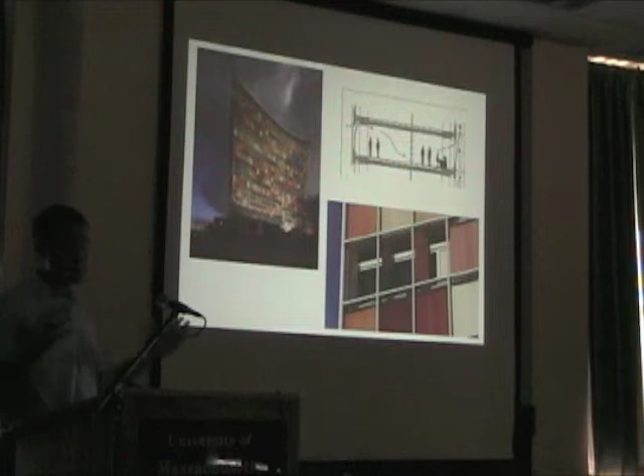If you can be heating that ceiling, which in turn is heating the floor and the spaces around it, you're getting thermally active surfaces—I'll credit Kiel Moe for that particular title. The idea is that you can dramatically lower your energy use and have a better level of comfort, particularly from the ceiling where you get much broader coverage. Whereas if it's in the floor, you put down a rug and you've shadowed it, you put down furniture and tables, and you begin to really diminish the amount of radiation you can reap from that.

Most importantly in this building is the ability to have an envelope which changes throughout the course of the day. This is an occupant-activated facade which controls daylight. In the morning, maybe only one or two of these panels are up. As the afternoon comes on and the sun comes around to the west facade, you begin to see all the colors come out as these shades come up—a beautiful way to have shading devices between the cavities of a double skin wall, which also becomes a ventilating shaft. The shape of the building and the blade at the top are meant to enhance the Venturi effect and the ventilation of the building.

A couple of student projects, just to show what we're up to at Northeastern with this idea. I thought this was an incredibly clever idea by a student who took as a prototype to study for structure this very innovative parking garage in Heilbronn. The idea was that these are just concrete slabs, block and plank, with long spans—a 54-foot span of steel. They began to take that as a primary system and add, not unlike the GSW building you just saw, a double skin wall with all of these same ideas. What we're pushing the students to think about is this idea of free space, clear span, adaptability with integrated systems.

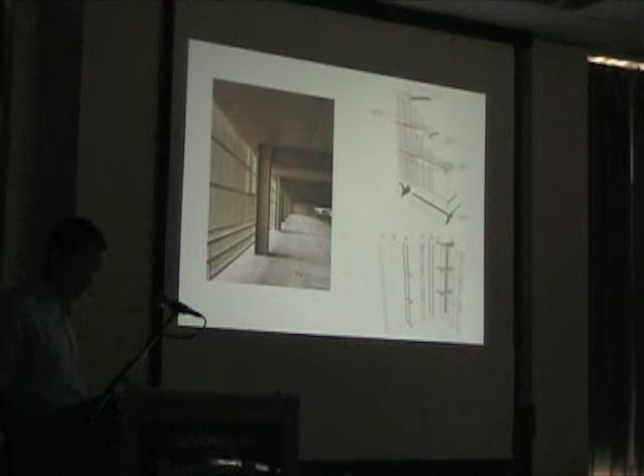In the case of this hollow core plank, they were pumping hot air and cold air through it to create a radiant surface to heat and cool the building. Fairly interesting ideas, and we have them go through all the requisite diagrams to solve that.

Another student project, real quickly, used basically stacked wood that was post-tensioned—stacking wood up and compressing it with the assistance of some metal cables and stays, as a way to create a primary structure for a building that, when done, can all be disassembled and brought back to the lumberyard.

Not a single hole goes in any of it. This is based on the idea of Peter Zumthor's exhibit at the World Fair a couple of years back. So really this idea that the students were looking at is where, you know, where does the building, where

Can it be generic and where does it have to be specific, and what are the ways you address that in terms of where the building touches the site. It has to fall into a certain logic of the campus plan. In this case, this is on the campus of Tufts University.

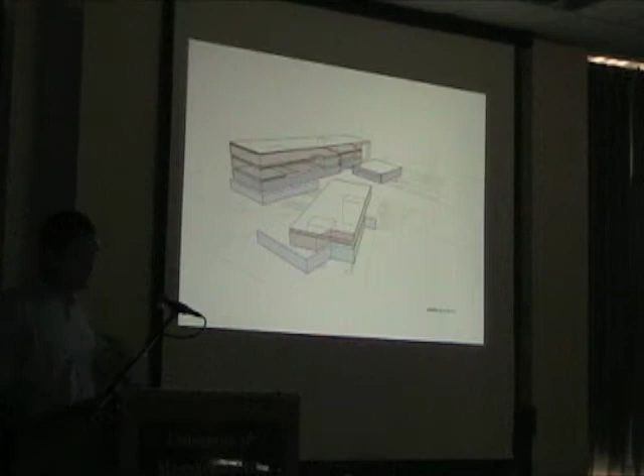But once it gets above it, it can be freed up to sort of be more general and then begin to really start to play into this next use and really looking at different ways. These are those kind of beautiful stacked wood structure systems that they used, and then just some of the ideas there. And then another way of looking at next use, which is really more about recycling.

This is a project we're doing for a company called Save That Stuff. This is a shipping container office building for them. And I guess I probably don't need to talk about the whole shipping container dilemma we have, where every single day in the U.S., many, many thousands of these keep piling up because of our trade deficit.

But in this case, for some reason we get a lot of requests from clients who want shipping container buildings, and for the most part, I'm pretty successful in talking them out of it, because in general, depending on the building type, it's actually a relatively bad idea. There's thermal bridging issues, there's all kinds of problems with it.

The aesthetic idea of it's great, but if you really want to capture that, if you want to do this right and be sustainable, you really should be insulating the outside of it, in which case you lose the whole dynamic of it.

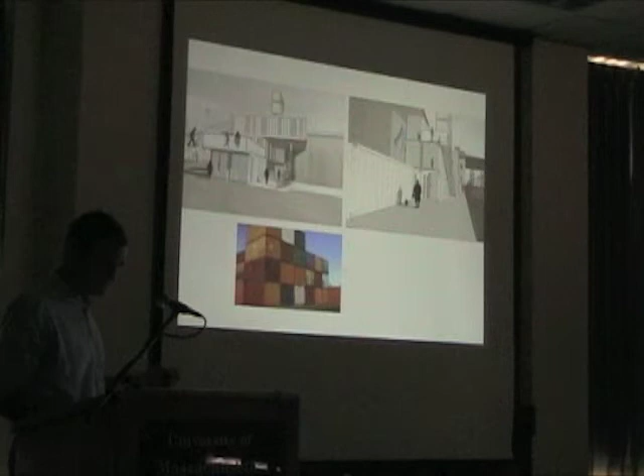In this case, I talked to the client about it. They're a recycling company, that's what they do. We figured, all right, for you, it's worth doing. So we tried it, we got through it, we designed it, we got it costed. It was too expensive, so then they decided to go a different route.

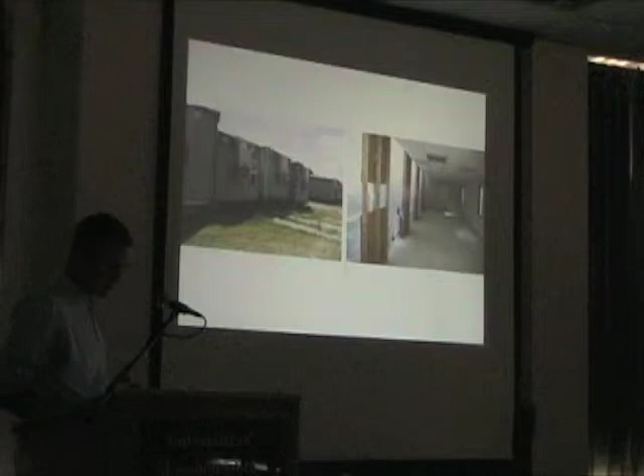And I really like this idea, actually. They bought used construction trailers, and we're right in the design process right now on this, looking at trying to take these construction trailers as modules and build them into a whole working office building. So this is the quick take on it, some quick sketches of it.

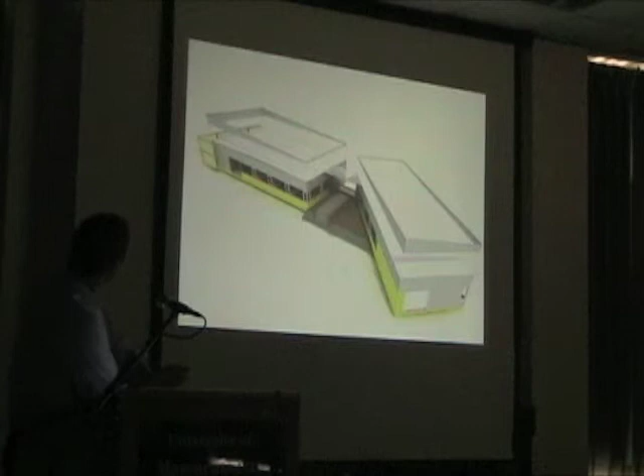Our first attempt at this had the kind of flat roofs that these boxes would have because of shipping criteria and all that. The client didn't like that, so we came up with this removable parapet idea, which then gave him a slightly more dynamic look to this, and they liked that a lot. So it became this kind of three-dimensional calling card for their firm.

And someone asked me earlier about deconstructible buildings. Well, this one not only deconstructs, but it's on wheels, forever, and it will never come off wheels. So at any time they can pack it up. And the reason they want to do this is that their lease runs out in 9 years, and if they're going to invest all this money in their offices, they want to be able to take it with them if

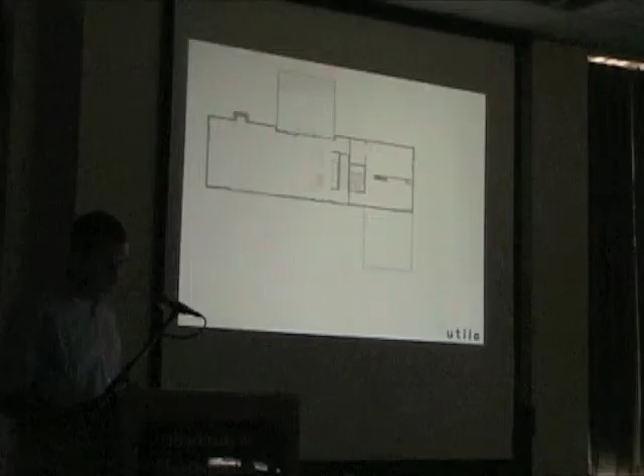they have to move. Talked about this house earlier, just some of the strategies of creating framing the stairs so that additional floors could be put on it, clear spans so that different types of reconfigurations can happen fairly painlessly. So just recapping quickly: structural robustness, systems integration, multi-point plenum, embedded, facade flexibility and daylighting, component

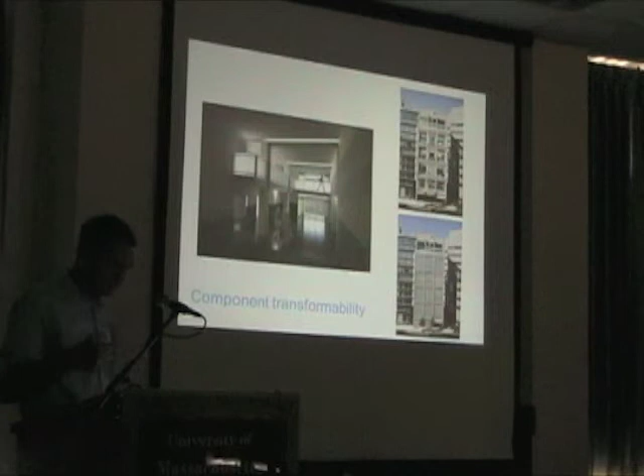transformability. In this case, this is a project we're doing up in the city of Lynn, where an old 18-foot first floor of a building was given a mezzanine level a long time ago, and we were able to carve out pieces that are creating double height spaces, but also keeping some of the two-floor components, and then dimensional flexibility.

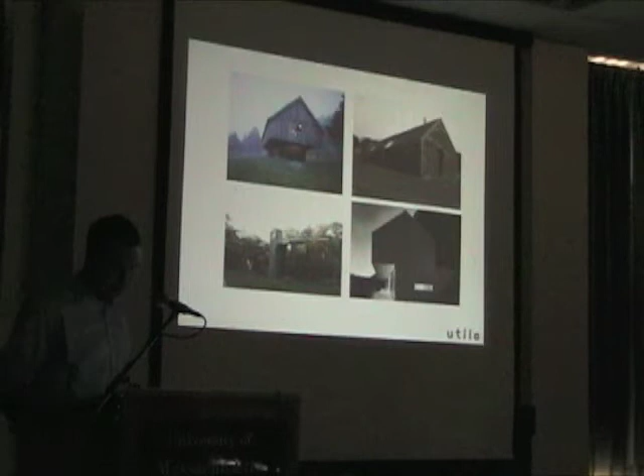And so I'll just leave you with what I think Western Mass's greatest next-use building is: the tobacco barn. I don't condone smoking, but they're not all in the middle of fields, they often happen in these semi-urban arrangements. They have great graphic capabilities, robust structure, and a facade which is transformable throughout the day. And you see them nowadays in a kind of modern expression all over the place.

So one of my favorites. Anyway, that's all I have for you. If there's any questions, please let me know, and I'm sorry that went a little long.

Lawson was over there, leaving me with the laser pointer.

What was the name of the project? E+. Yeah, if you just Google E+, you'll see all of the information on it.

The way it worked is that he put this out there as, here are 3 real sites, and they are there for the taking. If somebody feels like they can develop these, with a team of not just a design team but also a developer team, that developer team is now responsible for the execution of this thing - can they build it for a certain cost, which then allows them to sell it at a profit.